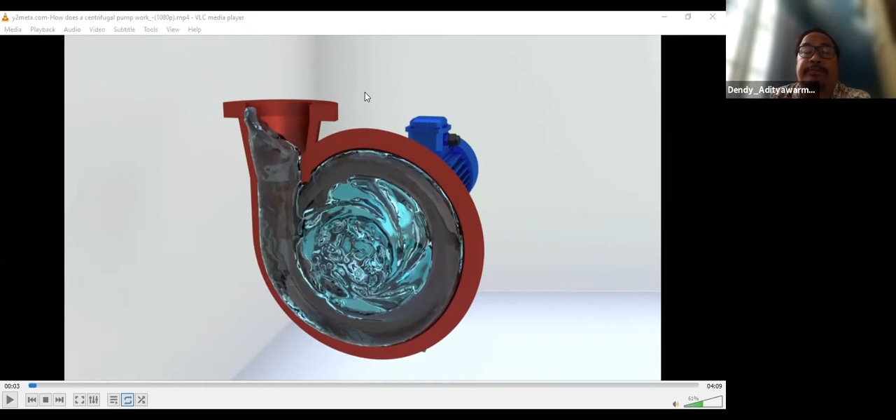Centrifugal pumps are used to pump water, oil, and other liquids. Let's try to understand why these pumps are designed to carry out the task of transporting liquids successfully. The main elements of a centrifugal pump are the casing and the impeller, which drives the liquid.

Sorry, ini oke ya? Enggak, videonya nggak kelihatan ya? Belum ya? Oke ya? Sekarang kelihatan ya? Halo? Kelihatan, Pak. Oke ya, saya ulang.

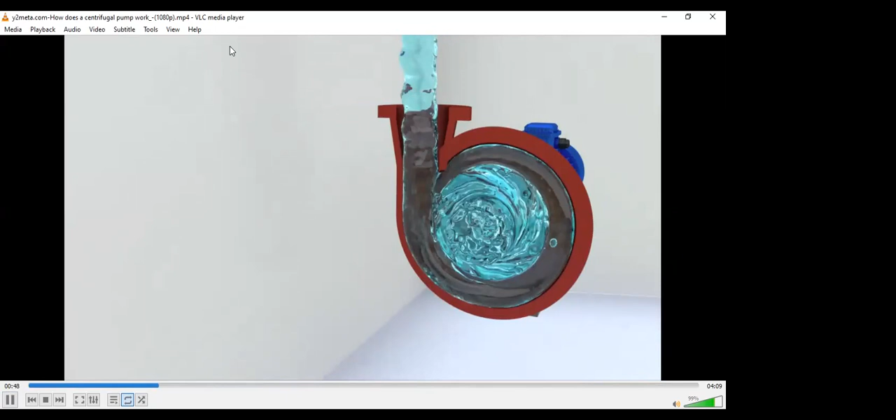Maaf, Pak. Kayaknya nggak ada suaranya, Pak. Nggak ada suaranya nih. Halo? Di saya nggak ada. Mungkin yang lain teman yang gimana, konfirmasi. Yang lain ada suaranya nggak videonya? Nggak ada, Pak. Nggak ada, Pak.

Ini gimana nih? Computer sound. Oke. Mana ya? Oke. Kalau sekarang ada suaranya nih? Ada? Halo? Apa terdengar suaranya, videonya? Nggak ada kayaknya. Nggak ada juga. Belum ada, Pak. Gimana caranya ya?

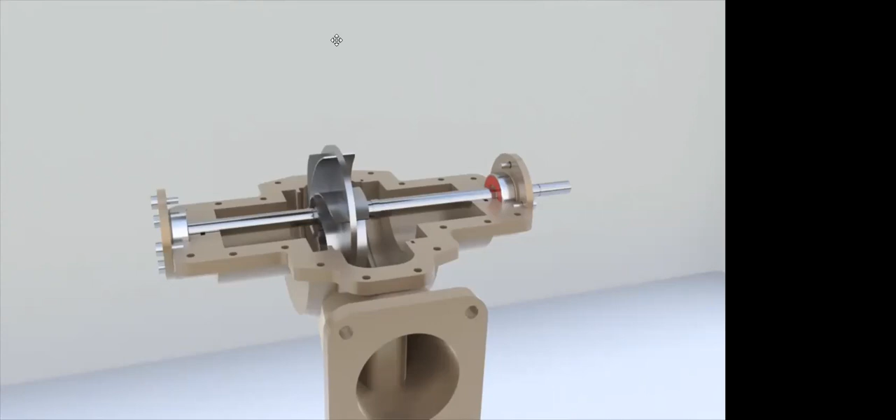Wait. Ini sel. Oke. Ini masih nggak ada suaranya nih. Belum ada, Pak. Nggak ada, Pak. Nggak ada ya. Oke. Oh, ini ada suara nih. Halo? Belum share screen. Belum share screen.

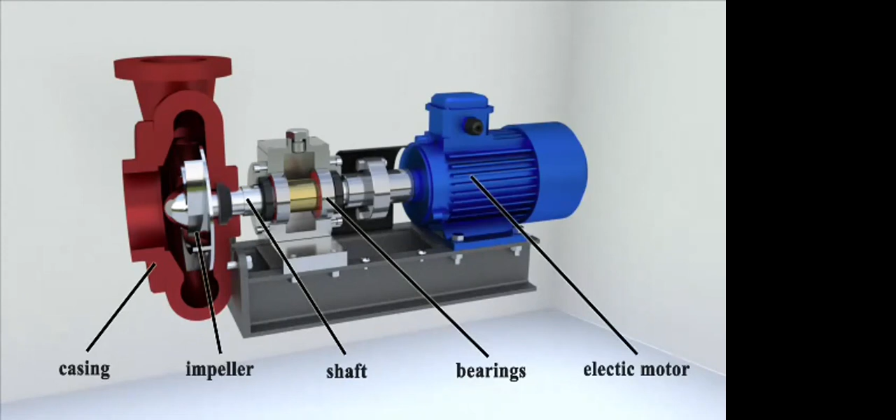The impeller of the pump rotates together with the shaft. The vanes in the impeller act on the liquid and make it rotate. The liquid particles are accelerated. As a result of the impact of the vanes, the energy of the liquid flow is increased. The accelerated liquid particles enter the volute, which converts part of the velocity into pressure. The diameter of the passage section of the volute and the discharge nozzle gradually increases. The fluid velocity decreases, and the pressure, according to Bernoulli's law, increases.

Three main types of impellers are used in centrifugal pumps: closed with back and front discs, vanes and fairings; semi-open with the vanes free on the front side; and open with the vanes free on both sides.

If bearings support only one side of the shaft, the pump is called a cantilever pump. It is a versatile design that is used in small and medium-sized pumps. A heavy impeller cannot be cantilevered. In this case, the shaft is mounted on bearings and the impeller is placed between them. This construction scheme is well suited for double suction impellers where the vanes are placed on both sides.

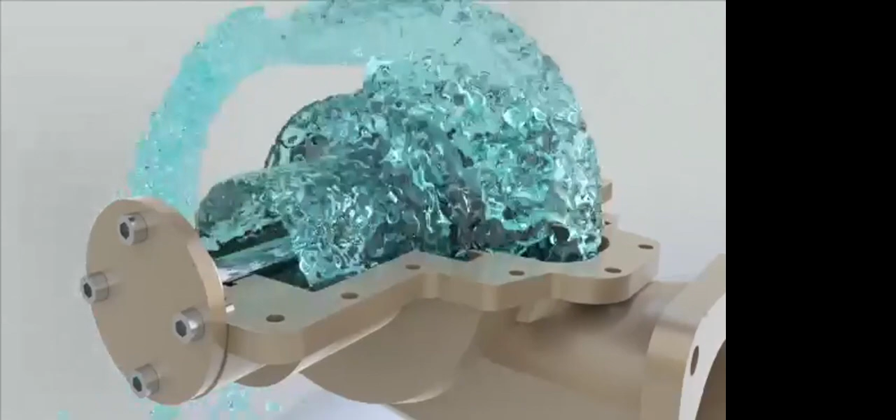A double suction impeller allows liquid to enter the impeller blades from both sides. Thus, we have two pumping units without significantly increasing the weight and dimensions of the pump. This scheme is relevant for pumps. Ini double suction ya. Ya, dibilang tadi bisa memperbesar debit tanpa menambah berat ya.

Pumps with high capacities because the pumping units are installed parallel. Multi-stage centrifugal pumps: by installing pumps in series, the head of the liquid can be increased in the system. Pumps installed in series can be combined by placing several impellers in the same casing. The liquid will go from the first impeller to the second one, from the second impeller to the third one, and so on. Using a multi-stage arrangement can increase the head of the pump many times over, as the impellers are mounted in series, and each of them increases the head.

In multi-stage pumps, different impellers can be used. For example, a screw centrifugal pump has an auger on the first stage and a centrifugal impeller on the second stage. When the pump is running, the liquid flows continuously into the pump casing through the suction nozzle. But what happens if there is no liquid in the pump?

For example, when the pump is first switched on, the pump casing will be empty. For the liquid to fill the pump, the pressure in the pump casing has to be lower than atmospheric pressure. Then the atmospheric pressure will cause the liquid to fill the casing. To reduce the pressure in the pump, some of the air has to be pumped out of the casing.

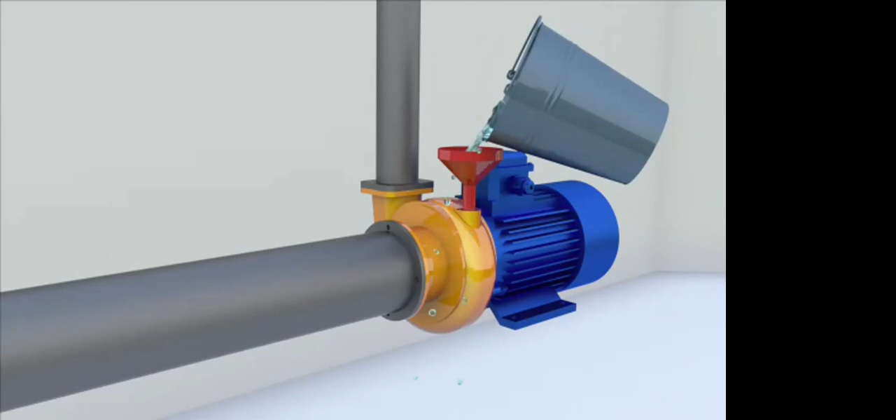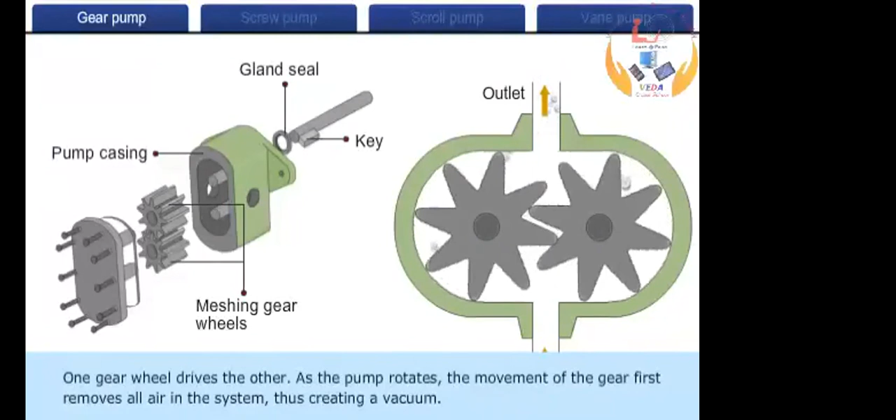As the pump rotates, the movement of the gear first removes all air in the system, thus creating a vacuum. This is because there is very little clearance between gear teeth and casing, which prevents backflow of the air. After all the air is expelled, liquid is drawn and pumped into the discharge pipe. The liquid is transported circumferentially between the casing and the gear teeth, not between the two gears.

The main components of a screw pump are meshing helical screws, an external drive gear, thrust roller races, pump body, and gland seal. Like the gear pump, the screw pump has screws instead of gears meshed together.

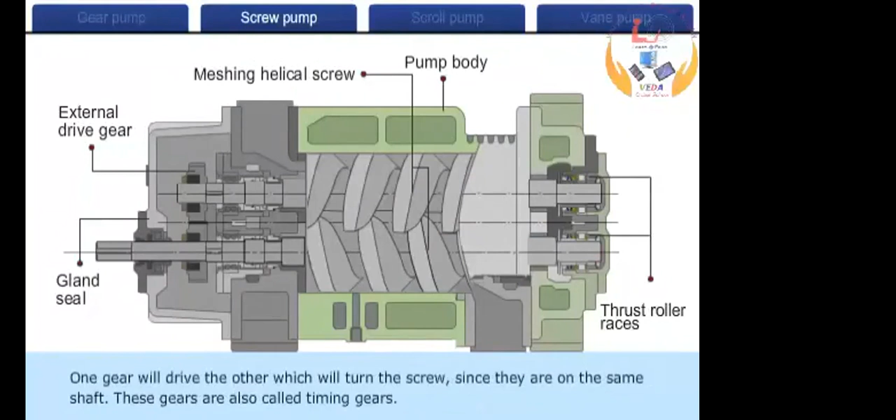Both the screw shafts are provided with gears. One gear will drive the other, which will turn the screw, since they are on the same shaft. These gears are also called timing gears.

As the screws turn, the trapped air in between the screw is pumped out to the discharge side. Air cannot flow due to small clearances between the screw and the casing. This creates a vacuum on the suction side and liquid is drawn into the pump. Liquid that is wrapped around the screw and the casing is transported axially to the discharge side. Screw pumps are often used to transfer lubricant.

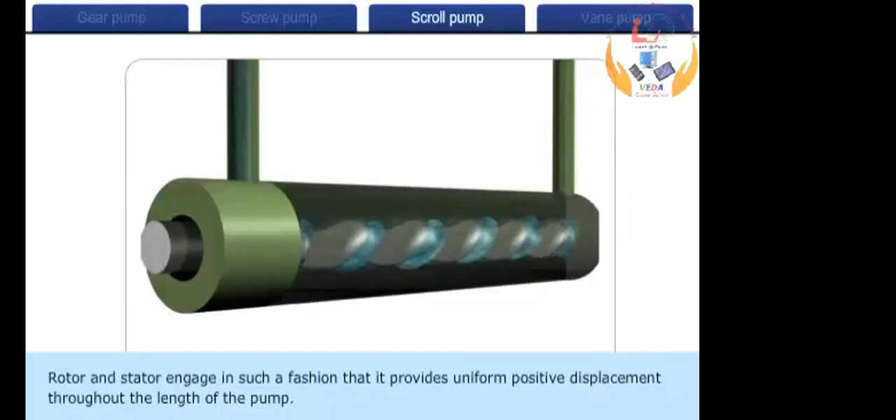The fluid is displaced axially through the pump. The center line of the pump moves slightly radially during rotation. Rotor and stator engage in such a fashion that it provides uniform positive displacement throughout the length of the pump. Also, the rotor and stator form a tight seal that prevents backflow of the fluid.

This type of pump is versatile, as it can be designed to handle a wide variety of liquids. It includes liquids that are more viscous, slurries, pastes, solids in suspension, and even delicate fluids, largely because of the low flow velocities through the pump. Heads of up to about 45 meters are possible for each stage employed. Multi-stage pumps of this type are also used for deep well services.

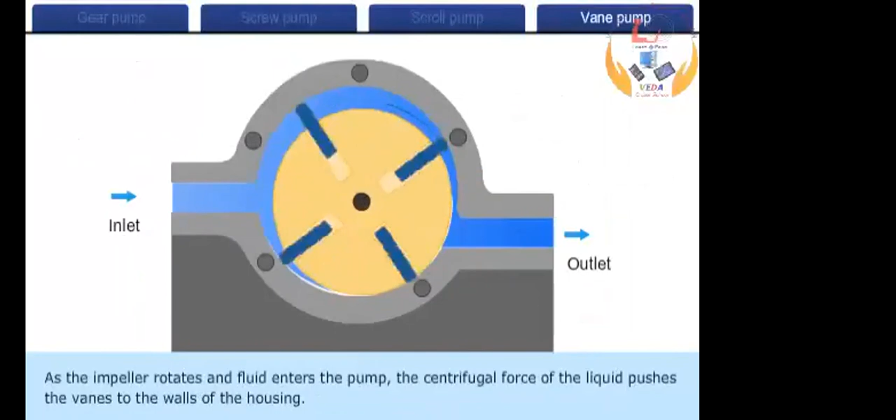Vane pump consists of cylindrical rotors with slots in it. The slots have vanes that can slide in and out. The rotor is positioned eccentrically to the center of rotation of the pump casing. As the impeller rotates and fluid enters the pump, the centrifugal force of the liquid pushes the vanes to the walls of the housing. The tight seal among the vanes, rotor, cam and side plate is the key to the good suction characteristics common to the vane pumping principle.

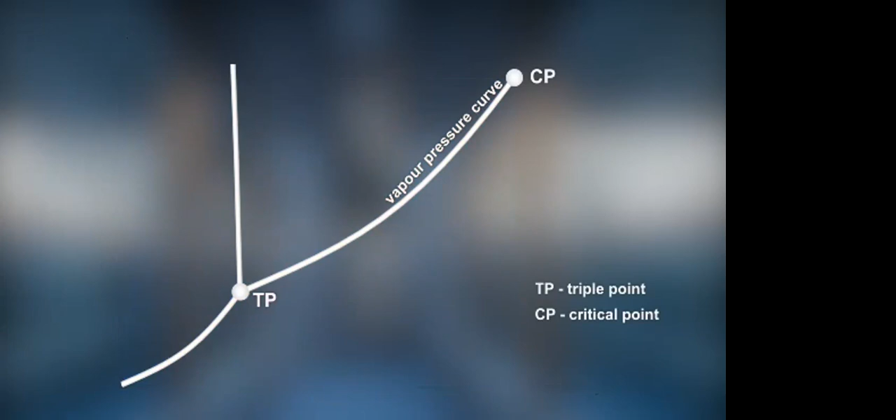Such cavitation bubbles are formed mainly in locations within the liquid where the static pressure becomes smaller than the liquid's vapor pressure. The phase diagram of water shows if water is in its gaseous, liquid or solid state, depending on temperature and pressure. The horizontal axis of the diagram represents temperature, while its vertical axis shows pressure. The vapor pressure curve is part of the phase diagram. It indicates at which pressures and temperatures water evaporates from liquid to vapor, or condenses from vapor to liquid.

At a constant pressure of 1 bar absolute, water in its solid state, which is ice, melts to liquid water at a temperature of 0 degrees Celsius. Keeping the pressure constant at 1 bar absolute, liquid water evaporates when the temperature is increased above 100 degrees Celsius.

Evaporation of water is not only possible when the temperature is increased at a constant pressure. The other possibility is to keep the temperature constant and reduce the pressure below the vapor pressure. Water can evaporate and condensate at temperatures below 100 degrees Celsius if the static pressure is low enough.

This is exactly what happens when cavitation occurs. Bubbles of water vapor form when the pressure in a certain location decreases below the vapor pressure. The vapor condensates back to liquid once the bubble has reached a location with a pressure above the vapor pressure.

But how is it possible that the pressure becomes very low in certain areas of a fluid? Let's have a look at an example for illustration. If objects, such as blades of a ship propeller, are moved through water, there is a higher pressure on the side facing the flow and a lower pressure on the opposite side.

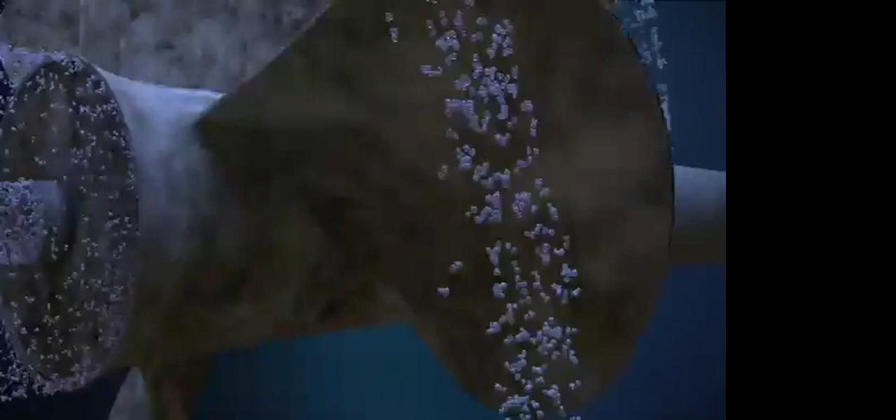On other edges exposed to the flow, low pressure can also lead to cavitation. The bubbles collapse as soon as they reach an environment with a pressure above the vapor pressure.

When pumps circulate water through piping systems, cavitation can occur where the pressure is lowest, at the inlet of pumps and in narrow pipe sections. If the pressure at the inlet of a pump is low and approaches the vapor pressure, cavitation can occur at the pump impeller, as we have seen it at the ship propeller. The pump can deliver less water because the cavitation bubbles occupy part of the cross-section where the water should flow.

Damage from collapsing vapor bubbles will be shown later.

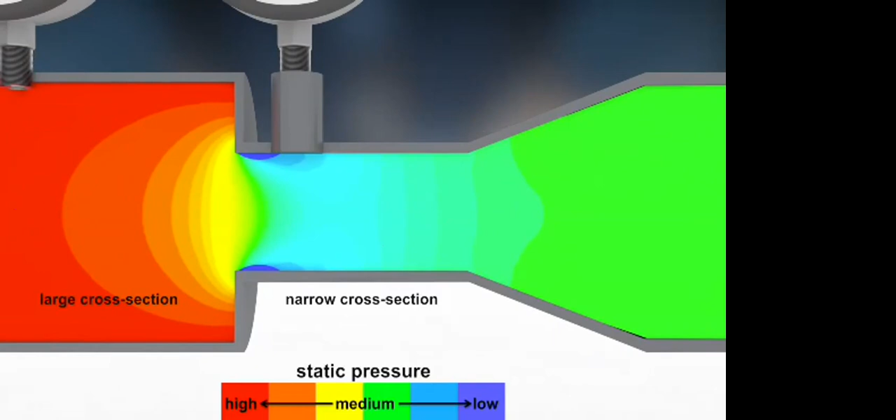The same amount of water per time flows through the pipe with a large cross-section as through the narrow cross-section. Therefore, the velocity is higher in the narrow part and the static pressure is lower. The pressure is especially low at the exposed edge at the inflow side of a narrow part.

We show a detail of a phase diagram of water, which allows us to analyze the situation in a narrow pipe section. The temperature of the flowing water can be 20 degrees Celsius, which is a vertical line in the diagram. It crosses the vapor pressure line at an absolute pressure of 2,300 Pascal. As long as the pressure is higher, water remains liquid. If the absolute pressure decreases below 2,300 Pascal, water evaporates.

The colors in the left visualization correspond to the colors indicated on the vertical axis of the phase diagram on the right. Upstream of a restriction, the static pressure is well above the vapor pressure. The static pressure in the flow decreases as the flow reaches the narrow pipe section. In our example, the pressure at the exposed edge is below the vapor pressure. Consequently, water evaporates and cavitation bubbles are formed.

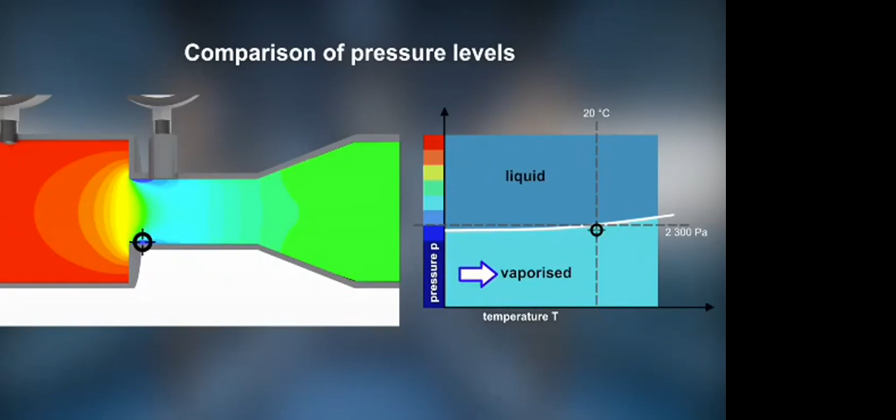The low pressure at the exposed edge causes cavitation bubbles to form.

At a pressure of 2,300 Pascal, a certain mass of water vapor requires over 50,000 times more volume than in its liquid state. The bubbles collapse as soon as they reach a region with a pressure above the vapor pressure.

Because water from the vapor bubble occupies 50,000 times less volume after having condensed to its liquid state, the collapse of each bubble is a spectacular event and emits pressure shocks. Pressure shocks from many collapses result in an audible noise very characteristic to cavitation.

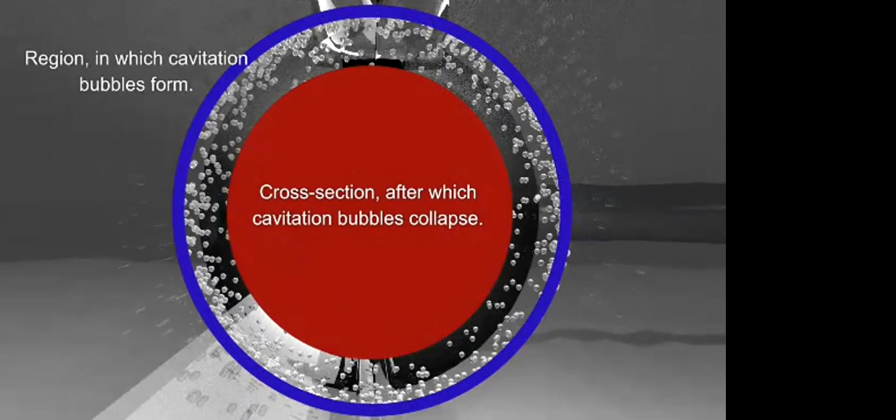The sound used now in the video has been recorded in an experimental setup similar to the one in the animation.

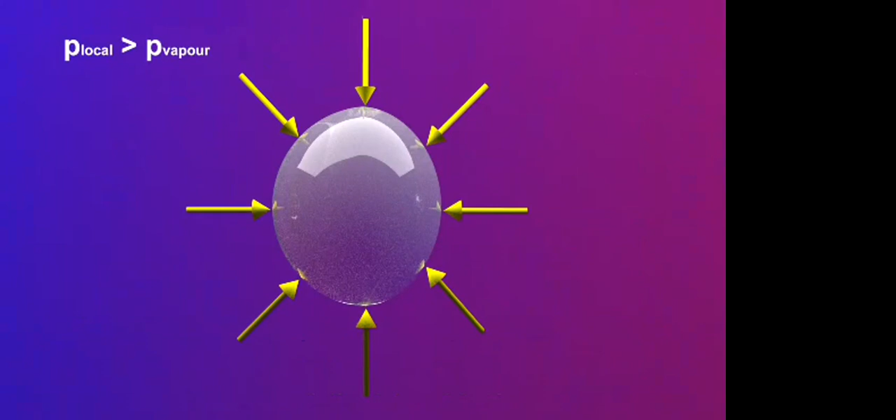If a local pressure exceeds the vapor pressure, vapor condenses, starting from the bubble's wall. Its surface starts to break down at its weakest spot. A microjet forms and pierces into the bubble's opposite surface. The bubble is now collapsing.

The bubble becomes a torus and disintegrates further. The microjet continues to flow in the liquid and can hit a wall. Through its concentrated impact, even high-strength material can be damaged.

The implosion releases energy in a very short time concentrated in a very small spot. If the microjet hits a surface, it damages the material by a localized short-term overstraining.

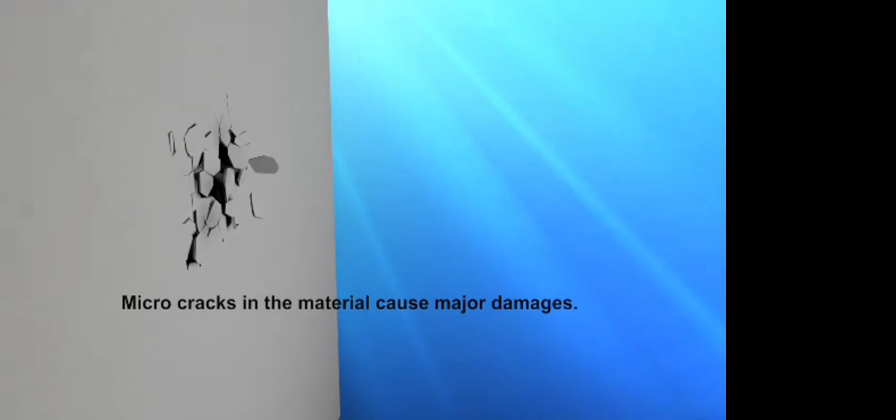We show a few examples of damage in pump impellers kindly provided by the Swiss pump manufacturer Häny. A brand new impeller to the left in comparison with an impeller having been continuously exposed to cavitation during 6 months, another impeller with damage from 12 months operation in cavitation, and one from 24 months.

The new impeller shows the geometry as it should be under normal operation without cavitation. After 6 months of operation under cavitation, material has been eroded in the center of the wheel. The respective areas are highlighted with grey color. The impeller blades are undamaged.

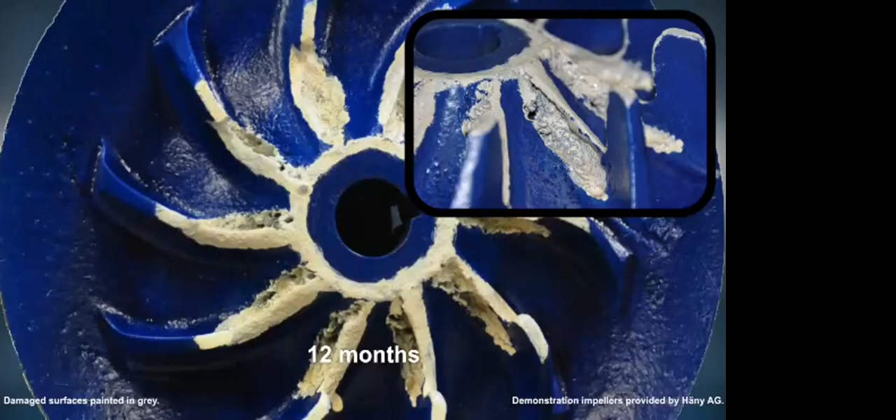After a year of operation under cavitation, the damaged geometry has a different shape, and therefore the flow has a different pattern. The collapsing cavitation bubbles cause material break-off at the top edge of the blades. After 2 years, the blades have been eroded completely, which makes it impossible for the pump to function.

In this video, we have shown the basic mechanism leading to the formation of cavitation bubbles, which reduce the flow of water. We have also seen the spectacular collapse of cavitation bubbles, leading to noise and damage even to high-strength material. Systems have to be designed such that cavitation is avoided.

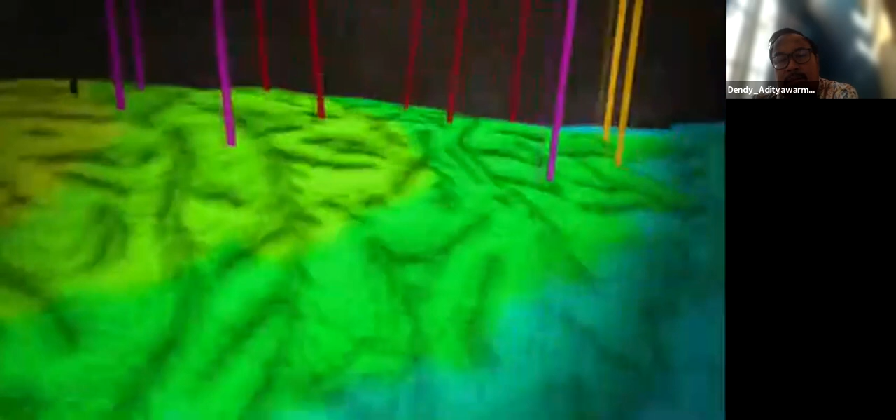120 kilometers off the coast of Norway is one of the North Sea's largest underwater gas fields. It's called Ormen Lange. At 40 kilometers long and 10 kilometers wide, and containing over 300 billion cubic meters of gas, it's simply massive. But it's locked in an icy tomb 3,000 meters below the sea surface, so deep and so remote that it's considered beyond the reach of man and machine. That is, until the engineers at Norsk Hydro, the Norwegian energy company, decide it's just too tempting to ignore, because there is enough gas to supply 20% of Great Britain's gas needs for 40 years.

The engineers know that in Britain there's an expanding market for natural gas. The coal they have traditionally used to power their economy is no longer sustainable. The Brits are increasingly using foreign gas to power the turbines that create electricity for their homes and factories, and they need more of it. So the engineers have come up with a plan.

It will take 10 years and cost $10 billion. First, they'll drill the Ormen Lange gas deposit, transport the gas 120 kilometers to one of Norway's largest processing plants at Nyhamna, then send the processed gas to the UK down the Langeled pipeline, a staggering 1,200 kilometers. But to build the world's longest subsea pipeline this far and this deep requires overcoming some...

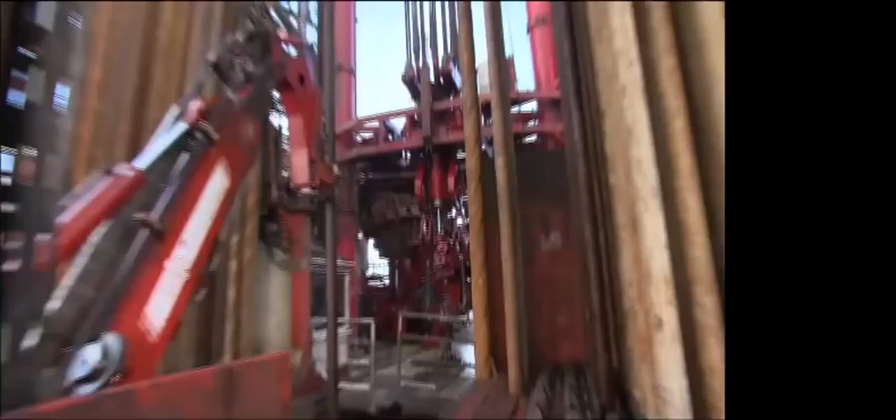They're drilling nearly 2,000 meters through the seabed to tap the gas field, and they'll do this with a rig built right on the sea floor.

The real fun begins with this, the Storegga slide. The pipeline that brings the gas out of the field and delivers it to the plant has to scale this 300-meter underwater cliff face. And the seafloor terrain is too rough to lay pipe on, so that means trenching this monster.

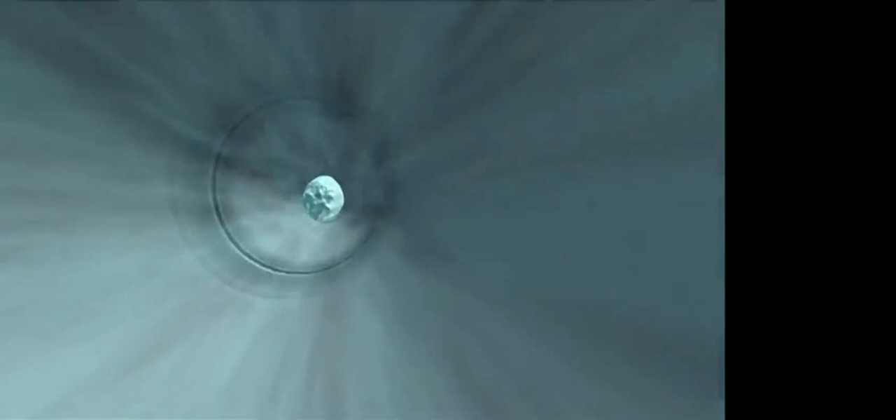The gas itself is a dangerous mixture of debris and frozen water that could blow a processing plant apart, so they're adapting the system to handle the Ormen Lange gas. The plant is big enough to turn through 70 million cubic meters of the stuff each day.

To handle this mega job, they've amassed some of the largest industrial ships in the world, each designed to tackle a specific phase of the deep sea construction.

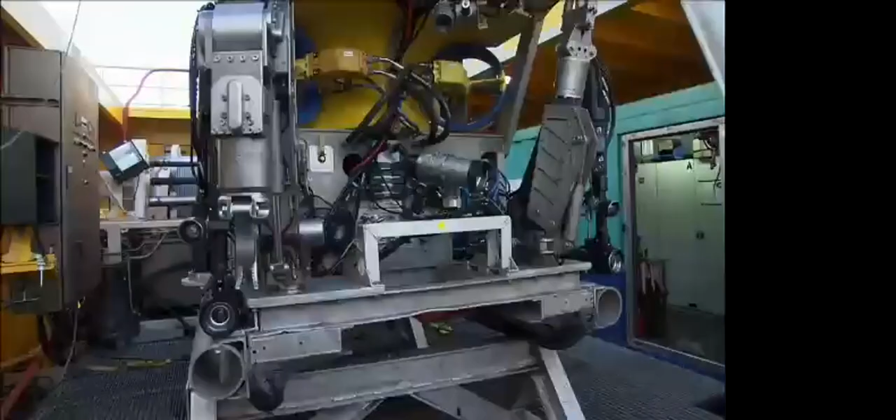Out here in the harsh North Sea, humans are confined to the topside world. Beneath the waves, the brawny work is done by these underwater remote operated vehicles, or ROVs.

They're a fantastic new breed of machines and are so technologically advanced, they're the stuff of science fiction.

It's a monumental challenge, but with a pile of gas industry money behind them, the engineers can dare to dream. But are these guys going too far? Can they make this dream come true, or is this going to be an engineer's nightmare?

First, they search the world for a gas well platform which would work in these torturous seas. Existing designs fall short. The weather here is too stormy. The water too deep.

Then they suggest a revolutionary solution. If they can't bring the gas up to a rig, why not take the rig to the gas?

Inside this warehouse in Tonsberg, on the coast of Norway, the key piece of solving that engineering challenge is being built. It's a daring move. The engineers are combining the function of a surface platform with a seabed drill guide. It's called a template, and it's an underwater gas platform that guides the drills through to the gas field and controls the well flow.

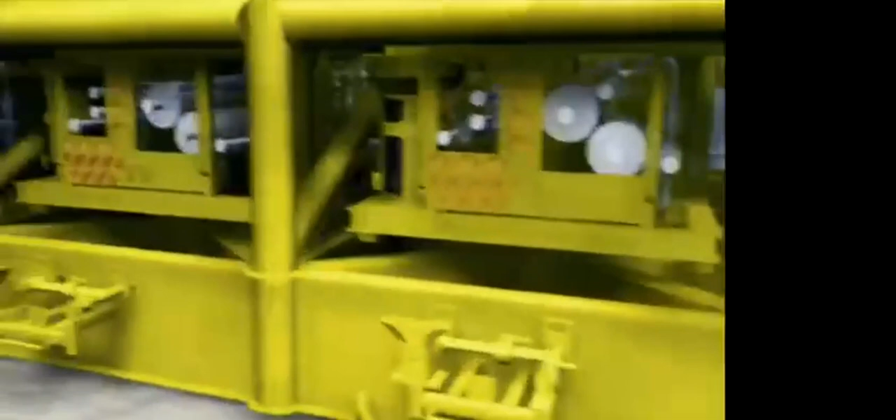Conventional gas platforms are sea surface structures, manned by an army of workers. In this case, the platform is dropped onto the seabed, clear of the wild North Sea weather. A drill ship then docks to it, and from above guides the drills through to the gas field.

When the drilling is finished and the gas is flowing, the drill ship departs, leaving the template to control the wells. Four of these monsters will be mounted on the seabed. Through them, a total of 24 wells can siphon over 70 million cubic meters a day from the gas field.

The template will then direct and control the gas flow to a shore-based plant, the entire unit operating by remote control from a manned center 120 kilometers away.

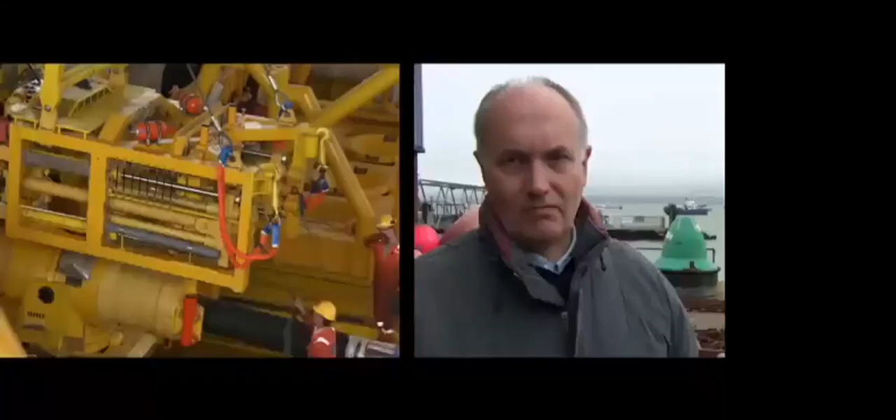Richard Benyon is a subsea engineer. The main difficulty you've got is it's dark, it's a devil of a job to put it in the first place. You've got to get this equipment onto the floor. It's a highly valued, highly priced piece of equipment, and then you've got to put it together with robots, and you've got to make sure it doesn't leak. And apart from that, it's easy.

The stakes are huge. Engineers are building it to withstand pressures that would crush a normal submarine, and it has to operate flawlessly for over 40 years in a harsh saltwater environment. Once it leaves this warehouse and is lowered to the sea floor, there's no going back. It's going to be committed to the seabed forever.

This 1,000-ton monster can't float on its own, so the structure is loaded onto a seagoing barge for transport to the drop site. With all the planning and building behind them, it's the weather that will determine if this mission is a success or failure.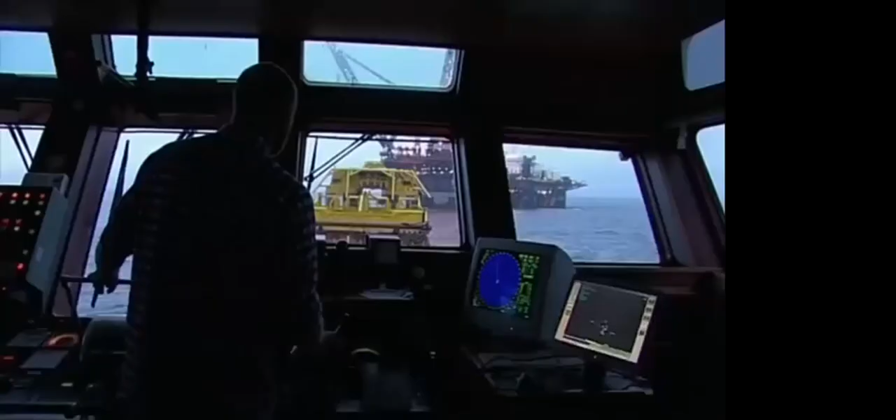It's a 4-day journey to the drop site, and they've planned it to coincide with summer, the season of the calmest seas, which doesn't mean much here in the North Atlantic. They rendezvous with the world's largest crane ship, the Thialf, a super crane that does heavy lifts at sea. The 2 cranes mounted on board can lift over 14,000 metric tons, about 80 747 jumbo jets.

The barge and Thialf wait for a weather window before lift operations begin. The contract to install the subsea components is worth $21 million. With so much at stake, they practice back on shore. The crane and ROV operators rehearse the drop in a 3D virtual underwater world, like the one they'll be working in.

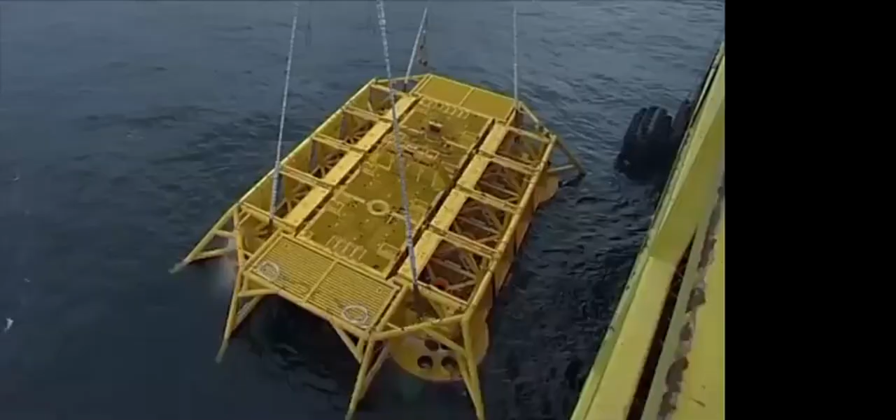With weather, depth, and weight going against them, they practice. Now it's time for the real thing. Lines are connected, and the record-breaking sea drop begins. This is their only chance. If they miss and it settles on the seabed in the wrong place, they'll have to build another one and set the project back by a year.

Computer-controlled thrusters hold the crane ship over the drop site. As it goes below the surface, the underwater ROVs are put into action to take over as the eyes on the operation. They feed video back to the control room, and the engineers scan the rig for problems as the pressure increases.

From 1,000 meters below, the ROV feeds video back to the crane operator, who adjusts the orientation. They have to keep the ball bearing as close as possible to the center of the bullseye. He keeps the drop going, even when it's meters away from the sea floor. He's committed. There's no stopping it now.

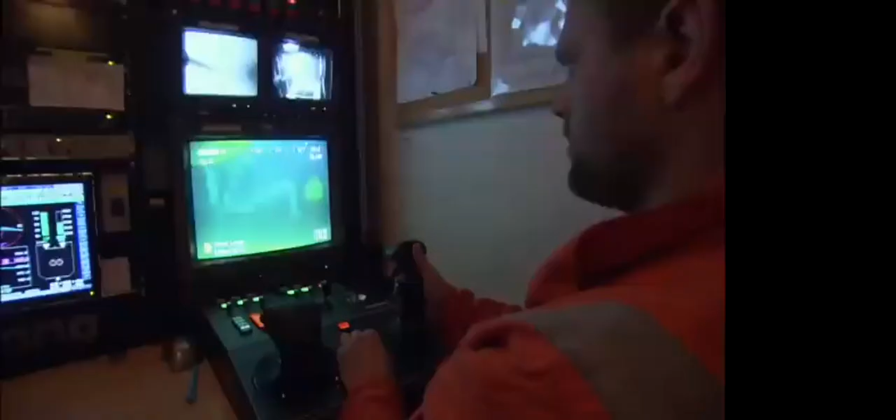It's down, and it's so heavy the legs on the base sink 8 meters into the seabed. But they won't know if they landed on the right spot until they check the coordinates. The reading shows it's within 40 centimeters of their target, close enough to be considered a perfect drop, accomplished from 1,000 meters above on a rolling sea.

Now that the template has been successfully placed, the next step is to tap the gas field. It takes 2 years to drill the first 8 wells, and they must have them ready to go before the pipeline can be connected. A specialized drilling ship, the West Navigator, is moved into position over the top of the gas field. The Ormen Lange gas wells will be the largest deep-water wells drilled in the world.

They drill the field with a powered drill head operated from the ship. Once assembled, the pipe is lowered through the bottom of the ship and down the 1,000 meters to the template. From here, the drill head moves another 2,000 meters through the seabed to the gas deposit, and then it snakes its way through the gas pockets.

Every step of the way is monitored and recorded in a virtual database, which keeps expanding and is used by the engineers and surveyors to plot the next drilling spot. Back on land, the team can enter the cave, an amazing 3D undersea world. By virtually passing over the seabeds and the gas find, they can locate the most promising parts of the deposit.

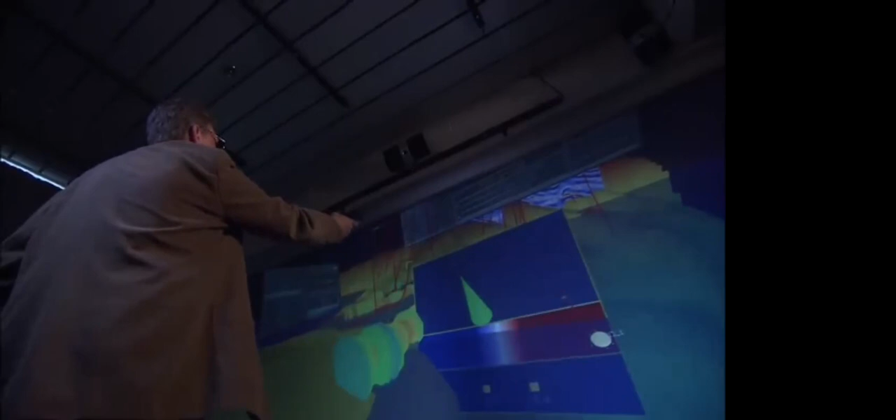Jens Grimsgaard can plot the drill's movement from the cave. With a joystick, I could also fly in this world by just using this tip here, and using the movements of my hand to steer myself through this reservoir.

During the drilling, data collected by the drill is sent back in real time to this database, which is constantly being updated. The computer generates the images.

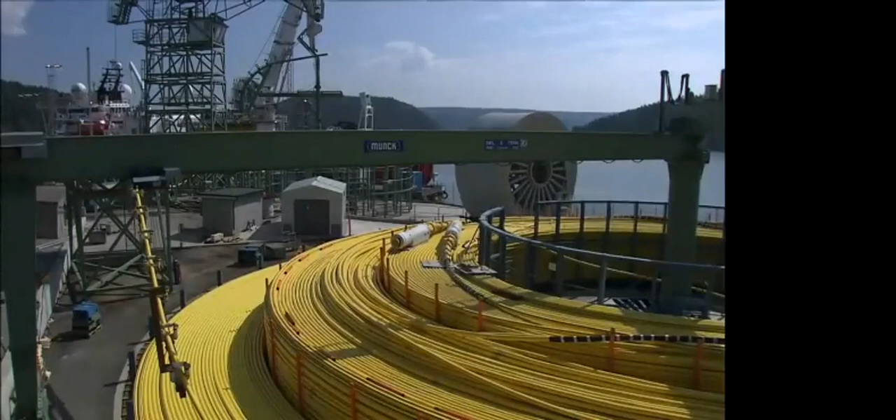The template gets its power from the land through a 120-kilometer control cable called an umbilical. This cable...

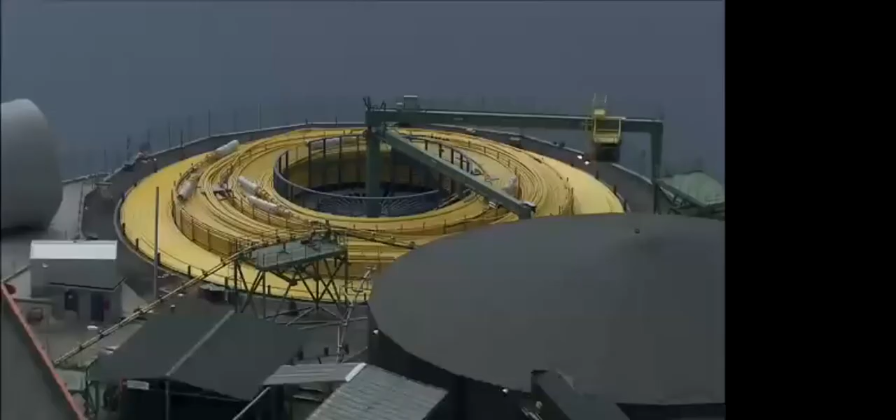The cable is built in a factory right on the dock. As the cable is made, it is fed onto a giant spool on the deck of the Scandi Neptune. Once the 120 kilometers of continuous cable is spooled up, it will head out to the Ormen Lange gas field to connect the control room to the four underwater templates.

But now, they have to prepare the seabed. The bottom of the ocean under the North Sea is a treacherous place. And, as you're about to discover, the engineers building the world's longest underwater pipeline are facing a mountain of trouble.

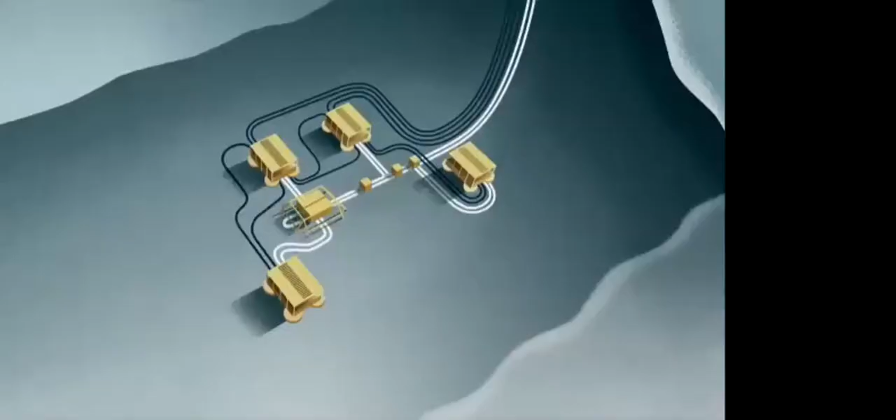8,000 years ago, two pieces of Norway, each about the size of the island of Tobago, slid into the sea, causing a mega tsunami. The landslide, known in Norwegian as the Storegga, created a huge shelf in the ocean's topography. The Ormen Lange gas field is on the edge of the Storegga, locked inside the huge depression left behind by the slide. This underwater disaster created a mountainous seabed with peaks that rise between 25 to 55 meters. But the biggest concern for Hydro is how to get the pipeline up the Storegga slide face, a whopping 300 meters. That's nearly as tall as the Empire State Building.

Underwater surveys reveal a rugged and fractured seabed. But the unstable sediments have long ago disappeared. The rock is more than stable enough, and it would take a new ice age to dismantle it again. But the study has made them more aware of the seabed and the pathway they will need to clear for the pipeline that will connect the underwater.

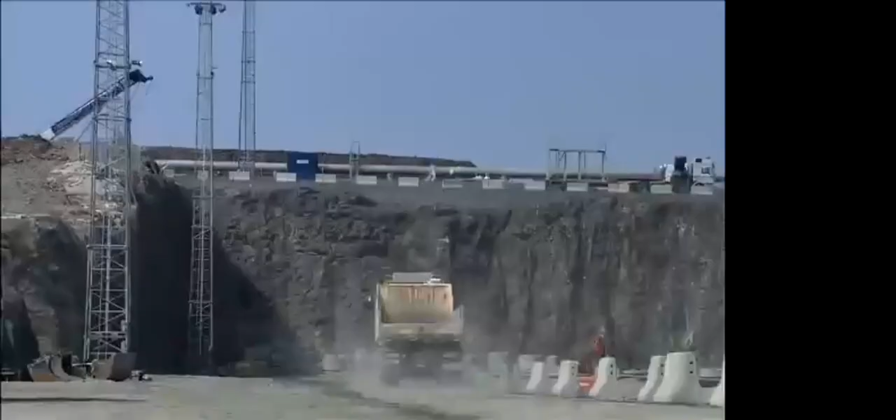Here, the raw gas from the Ormen Lange gas field will be converted into usable fuel. But to do that, over 2 million cubic meters of rock is being carved from the island, and over 30,000 tons of steel brought in.

Almost overnight, what was once a small village has become the busiest construction site in Norway. Over 2,200 workers are on the job site each day to keep this mega gas plant rising from the rocky coastline.

There's a canteen to feed 1,000 people at a sitting. Each night, the workers retire to the hotel, which will provide 1 million guest nights over the course of the project. But it will be removed.

Three-dimensional models of the plant have been built, and the engineers walk through it in virtual reality before and during construction. Every bolt, I-beam of steel, is pre-visualized. Because of the volatile gas, the specifications have to be executed perfectly.

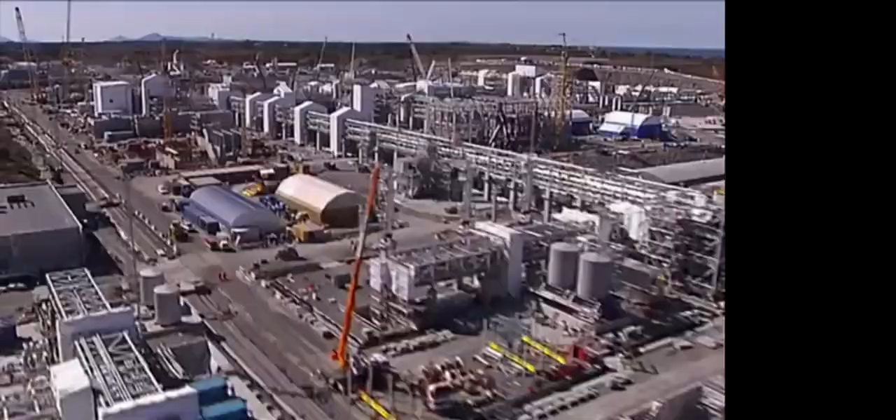But the plant has been built for efficiency. The raw gas travels through the pipes and is converted into usable fuel in a mere 10 minutes. That's a blink of an eye in this business. Then it will be ready for delivery to the UK.

The gas processing units are delivered to the island by ship. Cranes offload the components onto this massive flatbed transport. This remote-controlled monster has 48 independent axles and 96 wheels. It expertly shuttles the thousands of components needed to build the plant.

Here on land, the workers have a close working relationship with the job site. But offshore, the workers hand in their wrenches for what else? Joysticks. Offshore, the underwater work is done with remote-operated vehicles, or ROVs, from pipe laying to heavy lifting. And that requires a lot of different ROVs and people who can operate them.

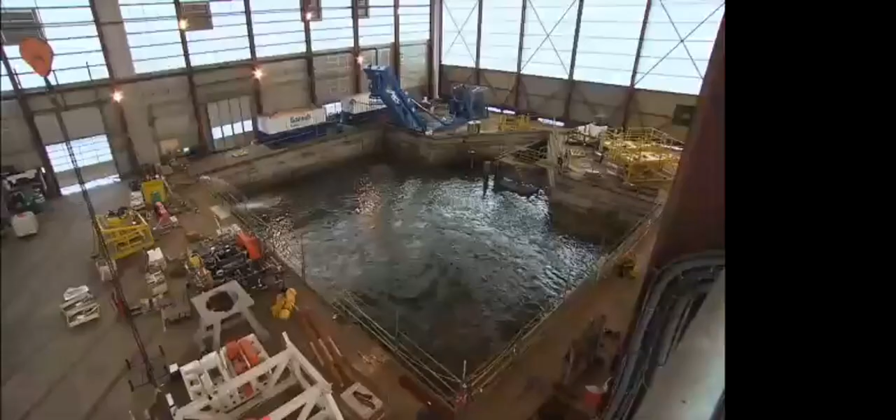In this warehouse is a simulation tank built just for offshore personnel to train on ROVs. It's driving school for robot jockeys. Here, they simulate projects that will take place.

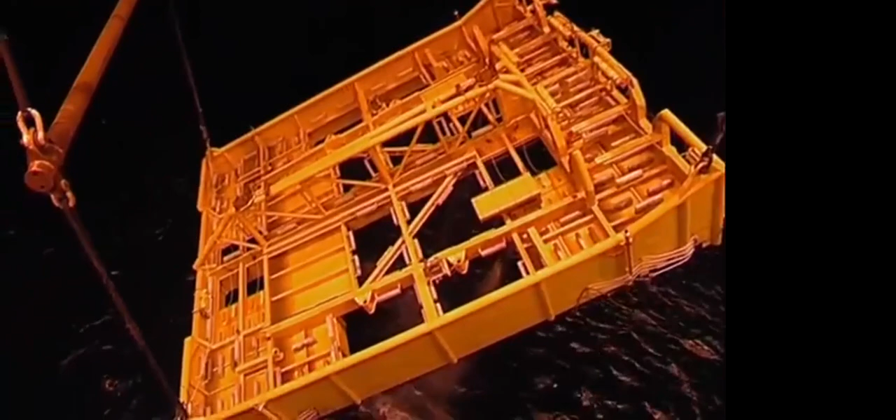This is the Pipeline End Termination Unit, or PLET, a big machine for one simple task. It connects the underwater template, or gas well, to the Ormen Lange pipeline. But it's never that simple. At 35 meters long and 30 meters wide, this 350-ton device is being lowered the 1,000 meters to the sea floor.

Now that the PLET is on the sea floor, they assemble its components. Called modules, these components make the crucial connection between the template and the pipeline that feeds gas to Nyhamna. All the connections at this depth are made with ROVs.

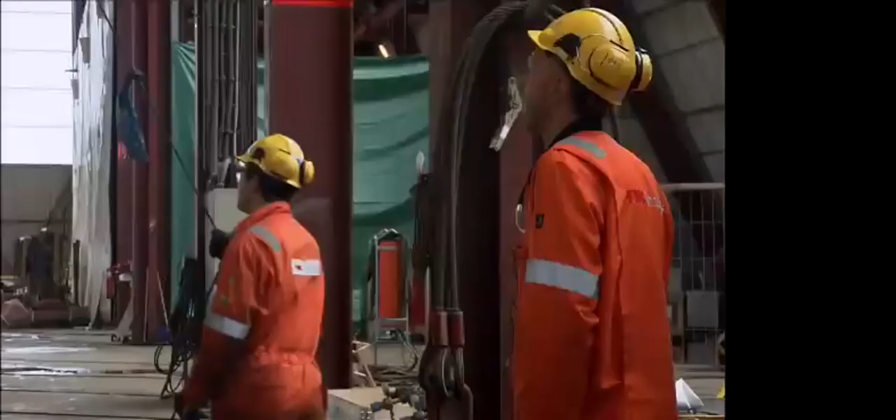But they can't do any of this work without first testing the systems. Thomas Berndt is the subsea manager. We are testing and testing and testing here, and when we leave this hall, we are 100% sure that this connection will be tight when we come offshore. There won't be any leakage. A leakage offshore at 850 meters with large volumes of gas is a disaster, which we have to avoid.

They practice lowering the modules and testing the connections, which will be handling 70 million cubic meters of gas each day. They're training with an exact replica of the one that's on the sea floor. It's a large investment, but money well spent.

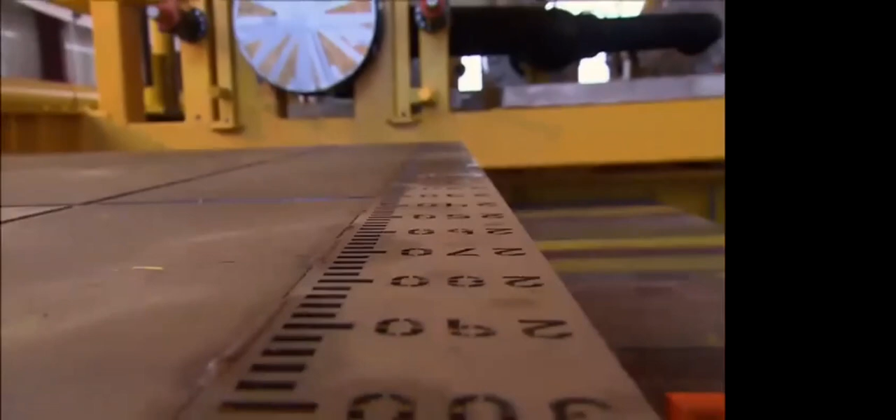Surrounding the connection module is a steel cage that protects it from stray objects that could drop off the drill ships and fishing trawlers. When the gas exits the field, the steel pipe expands. A little bit of expansion is okay, but the reason they're going to this much trouble is they expect the Ormen Lange pipeline to expand along its entire length by as much as 1 meter, and that's enough to rip it apart. So they've solved this by using a connector that slides back and forth on rails. It absorbs the pipe's movement and keeps the gas flowing.

Meanwhile, the engineers are tackling the Storegga slide and trying to get the umbilical cord, or control cable, run from the template to the control center, 120 kilometers away. But to do this, they have to find a way through the rough and tumble terrain left in the wake of the slide. The solution is to build an underwater excavator, agile and strong enough to handle the job. It's a daunting prospect.

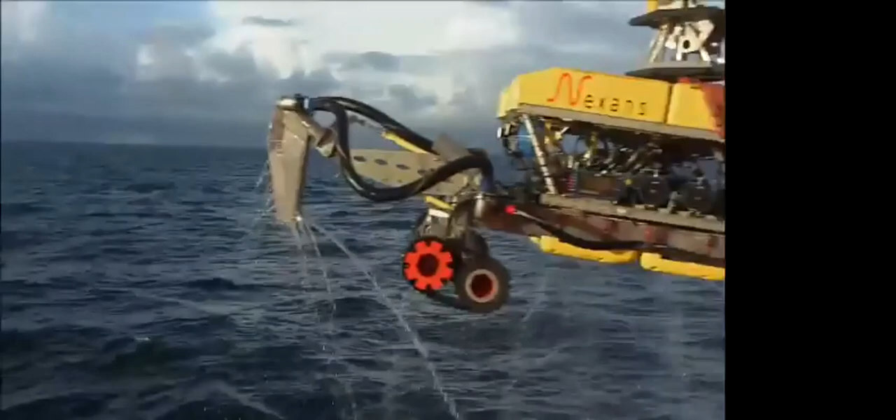That is, until they built the Spider. The machine that inspired this one was originally built for the Swiss forest industry. And like its Swiss cousin, the Spider moves along using powered tracks and articulated legs. Its mission is to excavate 6 trenches at water depths up to 1,000 meters. The biggest of them is a 4-meter wide by 4-meter deep monster trench, big enough to drive a truck through.

One Spider is outfitted with a powerful shovel. It's strong enough to cast aside a 3-ton boulder. Instead of a shovel, the other Spider has a suction nozzle, powerful water jets.

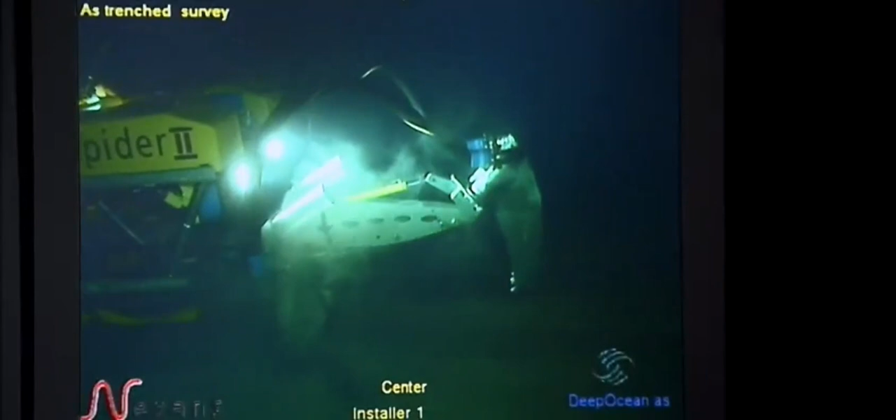The jets break up the sea bottom, and the nozzle sucks it up and fires the mud to the side.

All the while, the Spiders will contend with slopes up to 35 degrees. There are sensors on all movable parts, connected through an umbilical from a support vessel, which floats above and monitors its progress. The umbilical carries power and control cables and lets operators manipulate the 6-meter-long spider to within 10 centimeters of accuracy, from 1,000 meters above. It's an unprecedented mobilization of such complicated and agile robots.

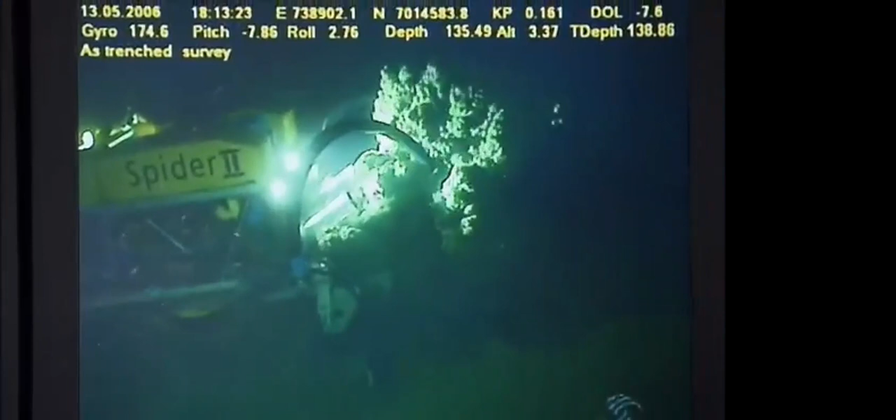In all, these two champion diggers managed to excavate 3,500 cubic meters of soil, creating a safe path for the gas pipeline.

The Langeled, which runs 1,200 kilometers from Norway to the UK, is the...

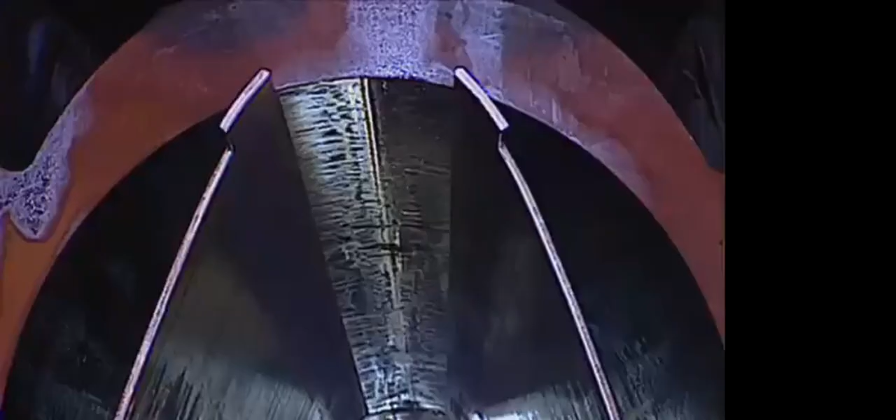This job requires 1/3 of the world's combined pipeline production capacity. That's over 1 million tons of steel. The value of the pipeline contracts is an unimaginable $700 million.

Langeled uses pipes over 1 meter in diameter, and each single piece of pipe has to be able to stand the enormous pressure on the sea floor for the next 40 years.

The pipes are each 12 meters long and weigh 10 tons. Another 10 tons of concrete and metal is added to give them enough weight to stay on the ocean floor. A total of 100,000 steel pipes are needed to span Norway to the UK.

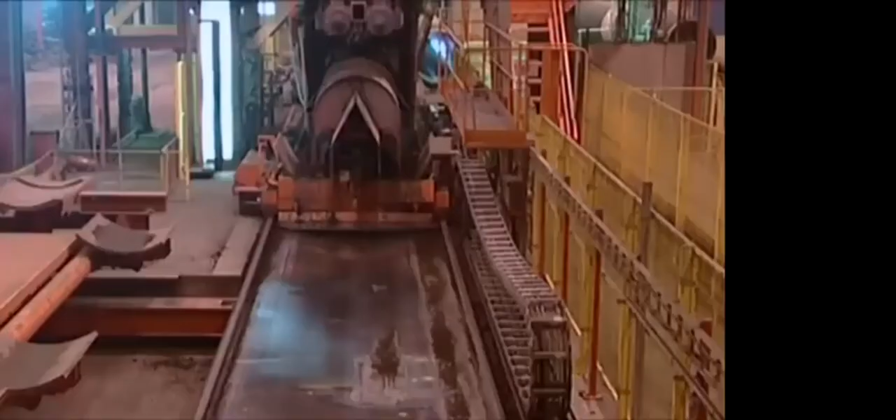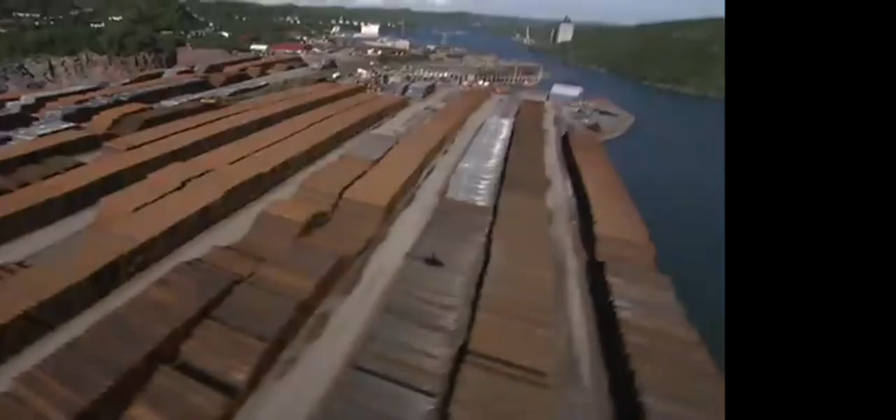As the team is trenching on the steep Storegga slide, the rest of the route from the top of the slide to the shore is being prepared. This is the Island Frontier, a state-of-the-art trenching ship that combines two types of trenching methods into one powerful machine.

They survey the flat areas where they think they can bury the pipe by scraping a trench through the sandy bottom. What they discover is not a pretty picture. The sandy bottom is actually clay, and the clay is hardened like concrete.

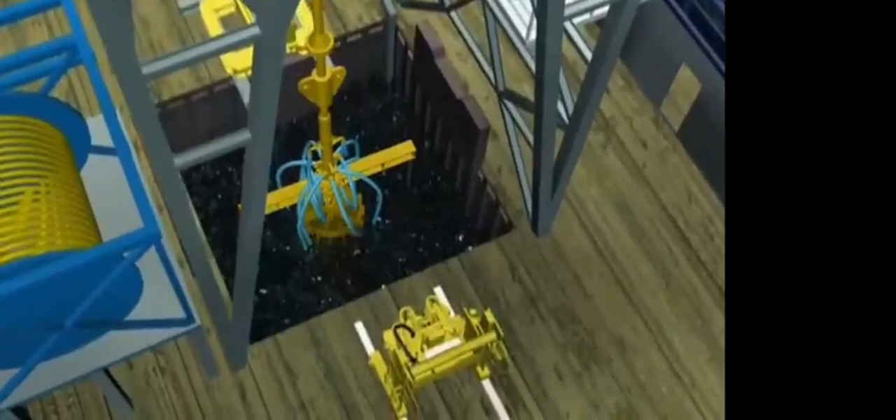A new digger is required to cut a channel up to 7 meters wide and 5 meters deep. The margin for error is only 50 centimeters on the width and a crucial 10 centimeters on the depth. The clay cutter hybrid, the only one in the world, is lowered to the seabed. The cutting tool uses its 24 water jets set at different angles to blast a trench through the clay.

Suspended above is the 4-ton jet prop. The propeller draws in large volumes of the surrounding seawater, driving it at a high force towards the seabed, clearing debris from the trench.

Transponders mounted on the sea floor relay a 3D picture of the operations to the control ship. Following along the entire operation, like a foreman on a job site, is an ROV that surveys the trench and confirms that it is dug to specifications.

The battle of the clay is finally won. But when they start to lay the pipeline on the seabed, the problems really begin. The seabed under the North Atlantic is a tortuous and irregular landscape. There's over 1,000 kilometers of terrain like this along the pipeline route from Norway to England. It's so rugged that only small sections of these heavyweight pipes will actually make contact with the seabed. It's called free spanning, and they don't want it. It means the unsupported sections of pipe will sag, stress, and then break under their own weight.

This would be an environmental catastrophe. They have to find some way of flattening out the pipeline route. If you're not able to plane the seabed flat by moving the earth out of the way, you may have to fill in some holes with rock or other fill material.

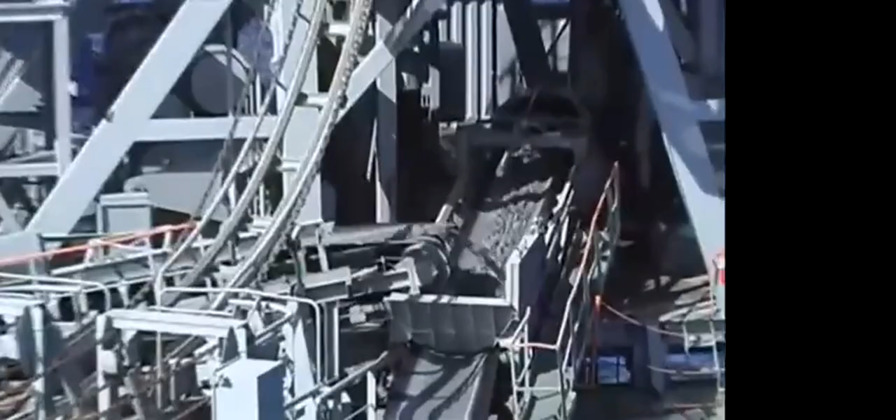They level the pipeline route by laying gravel down on the sea floor. This ship loads gravel into its cargo holds and delivers it to the area that needs leveling. It can carry over 9,700 tons of gravel at a time.

Once at the job site, it uses a flexible fall pipe to place the gravel on the pipe pathway. Computers create a 3D model of the seabed and the path where the gravel needs to be placed. This method allows the crew to place the gravel precisely where they need it.

At these sort of water depths, you've got a problem because you haven't got that degree of control. Whatever's doing the work down there is a huge distance away from the mothership, and they've still got to present a flat, smooth profile for the pipeline to be laid upon. The other thing that has to be worried about is that you have to do that profiling as close as possible to the time the pipeline is going to be laid, because Mother Nature tends to move things around again after you've left. You come back a couple of weeks later and find there's been a storm or whatever, and what you've taken so much care to flatten out has all of a sudden been moved around again. So you would lose the work that you've done before.

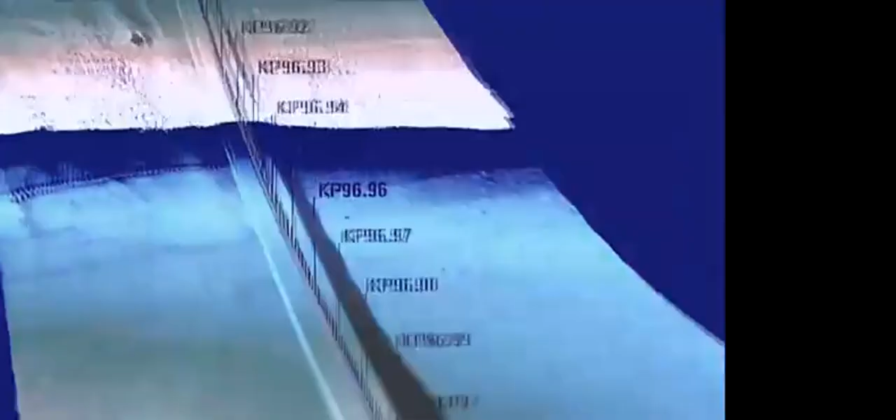The pipe laying itself is a monstrous job. Once the pipe has been manufactured, it is placed onto supply ships for delivery to the pipe-laying barge, the LB200. The barge is huge, longer than 2 football fields. It's an enormous floating steel welding factory, which has to work with military precision. There are only 3 of this type of ship in the world, and Hydro is using 2 of them here.

The pipeline route has been surveyed before we ever came here. We have ROV boats.

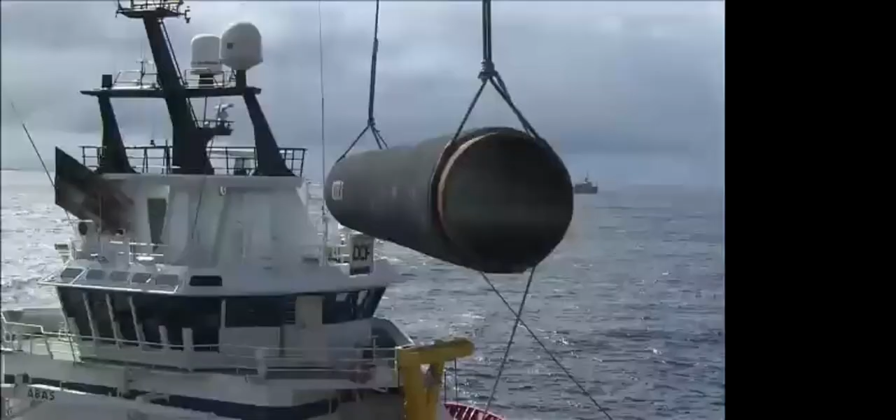The barge moves along at 4 kilometers a day and needs a constant supply of pipe sections, which must be delivered in the order in which they are to be connected and laid down. It's 100,000 pieces of pipe laid end to end in a predetermined pattern. They get moved by crane 3 or 4 times and go through about 15 or 20 welding stations and coating stations.

The pipe sections are delivered to the assembly floor, deep inside the LB200. Here, the welders are divided into teams. Their job is to create sections of pipe called double joints. These double joint sections are 24 meters long.

There's a lot at stake. The pipes have to be put together so there's no chance of leakage, and the assembly line has to keep up a steady pace.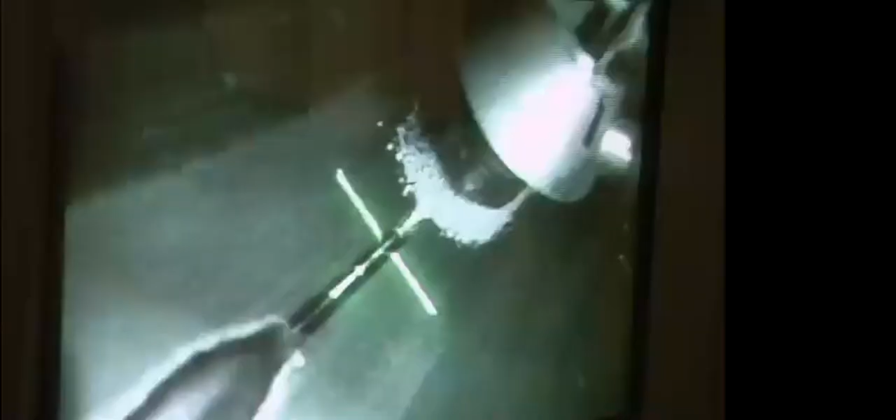The entire operation is monitored by engineers who have video cameras that put eyes on the process, both inside and outside the pipe. It's incredible technology, but the fundamentals are very simple. The fundamental thoughts that go behind it, because it has to be so rugged and it has to work every time, first time, mean that the actual basic engineering is still fairly simple.

The next stage of the assembly line is to join this short section of pipe to the main pipeline. It's being fed out of the back end of the ship and onto the sea floor. It's a complex process that requires a lot of fine-tuning.

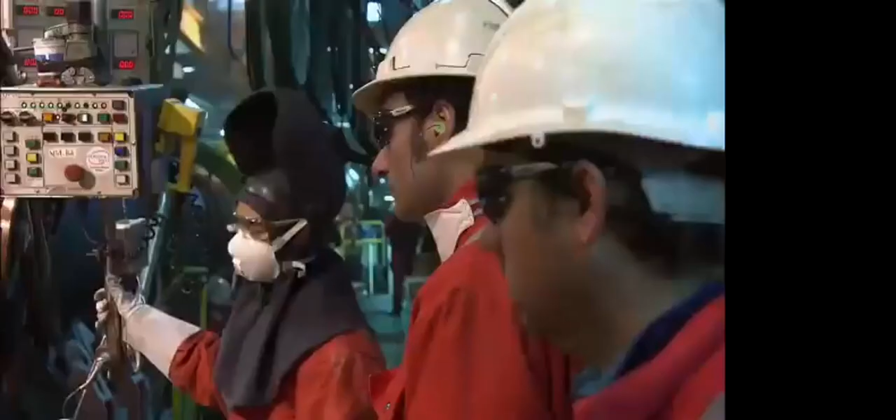This is no ordinary welding operation. The process involves a special welding machine with 8 heads per station.

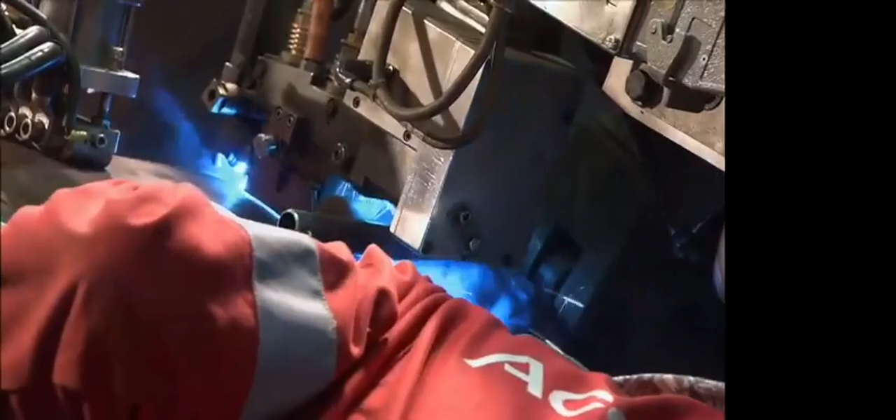The assembly line is manned by industrial workers from over 30 countries. Shifts work around the clock to keep the assembly moving 24 hours a day. Each day, the teams have to assemble 3 to 4 kilometers of pipeline and drop it to the sea floor.

After all the welding stations have linked the pipe, the final step of the operation is to seal the exposed metal. It is covered in a protective heat-shrunk plastic. Without this, the steel pipe would corrode in the seawater.

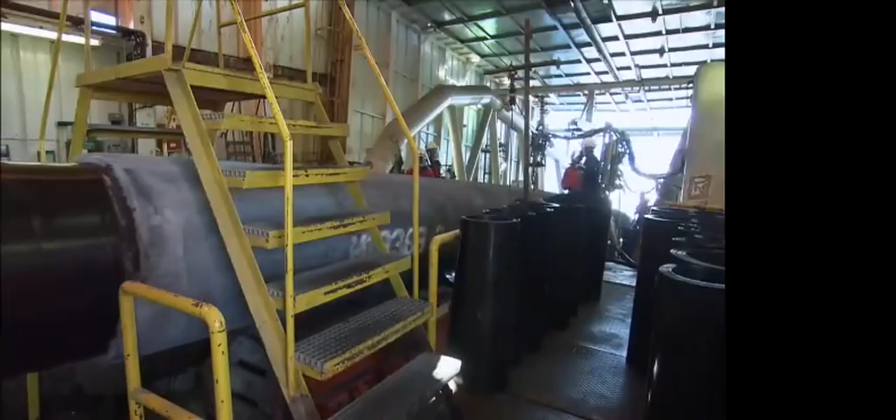Now, for the most critical step of the operation: offloading the pipe to the sea floor. The section where the pipes are joined is covered in foam to protect the welded joint during the drop.

The decks are cleared and the pipe is now ready to be committed to the sea floor. A rubber tensioner grips the pipeline and holds it in place as it slides off the barge.

As the pipe enters the ocean, it begins to sag and pressure is put on the entire pipeline, which is free hanging beneath the ship. Without exactly the right tension, the pipe could snap like a matchstick.

The pipe comes off the back of the barge in what's called a lazy S configuration, trailing down to the seabed some distance behind. That S of unsupported pipe has to be kept from buckling under its own weight. So to keep it under control, you've got to keep it under huge tension to stop it from collapsing under its own weight.

As the pipe is lowered, the barge moves forward 24 meters, not a meter more. With this well-oiled operation, the LB200 is able to lay over 100 kilometers of pipeline a month, as long as the pathway is clear.

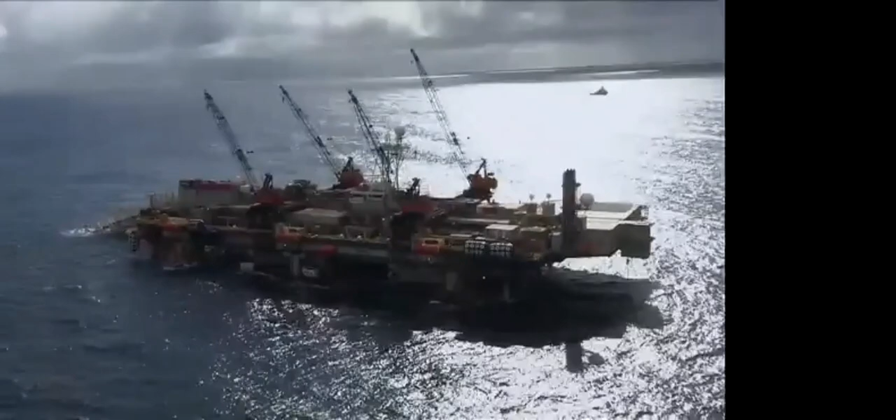It drops onto the seabed over the 1-meter diameter pipe, where its strong clamps pick it up. Then, as the surface ship pulls it forward, the plow cuts a trench 5 meters wide and 2 meters deep.

To fill the trench, the BPL-2 follows behind with backfill to cover the pipe with a protective coating of sand.

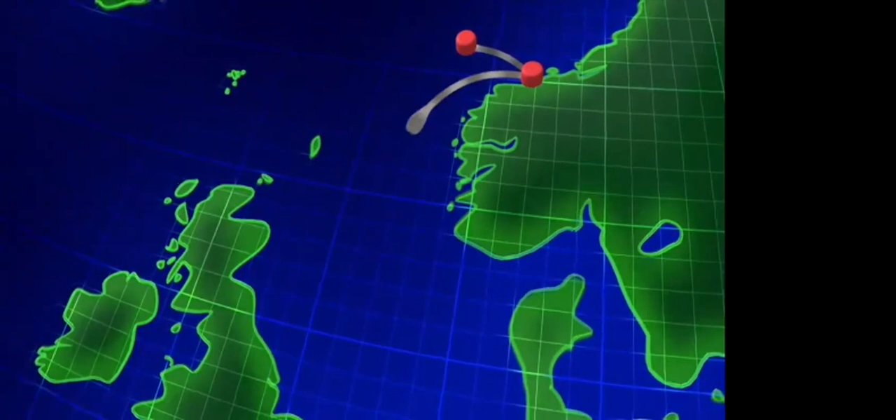Early in the design phase, it was decided that they would bring the gas from the Ormen Lange field to the processing plant at Nyhamna, and then build another 1,200-kilometer pipeline to Britain. At the 600-kilometer mark, the line is broken and connected to the Sleipner riser platform. The Sleipner platform works as a hub, monitoring the 70 million cubic meters of gas flowing into the UK every day.

But tying the pipeline into the platform creates a whole new set of engineering headaches. The underwater robots can line up the pipeline and the connecting pipes coming from the platform. A massive underwater crane moves them into position. But when they're matched up, there is no technology for replacing human beings in making the final connection. So the welders have to also become divers.

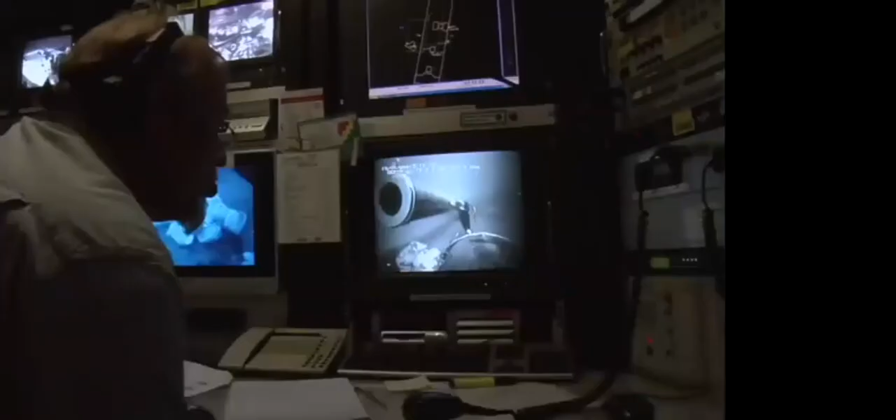You ready to come down? Your hose good? Okay, he's ready to come down. Thank you.

It's just that these welders are working on the sea floor. Like working on the moon, the divers move around in pressurized modules to the work site.

Do one lift on it and see if we can rotate it into its proper orientation with you guys. Hey, you're clear of that, Dearman?

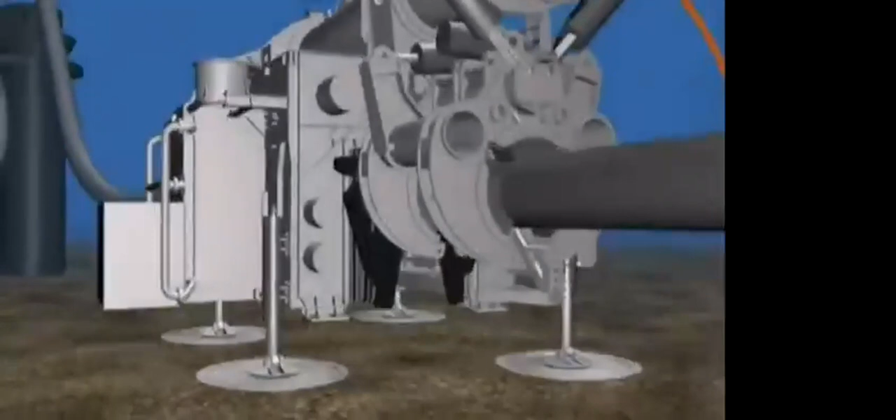Here, new edges have to be cut and beveled at each pipe end before the welding habitat is lowered onto the joint to connect the two sections. The welding habitat is dropped to the ocean floor. It has to be maneuvered in place perfectly over the 1-meter diameter pipe. It clamps the pipe and then closes itself off. The habitat is pumped full of air, forcing the water out.

Topside, the dive supervisor uses cameras to keep a close eye on them and watch for any danger. Once it's safe, the divers move from the module to the welding habitat. Within this habitat, the diver welders make the final, permanent connection. It's a tricky and dangerous procedure.

This is the first of many underwater welds that they'll need to make all the pipe connections to get the gas flowing. 600 kilometers of pipe still have to be completed. But a major goal has been achieved with this connection.

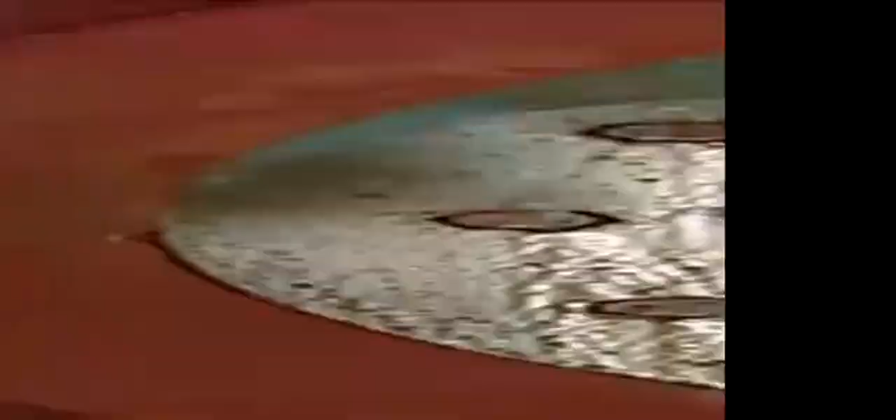Now that the pipe has been sealed and connected, it has to pass inspection before they commit it to the next 40 years of service. This is done with the pipeline inspection gauges, also known as the pig. It makes the epic journey through the entire pipeline, looking for weak spots and breaks. It also scrubs out the crud and salt water. Once in Easington, it emerges and the data is analyzed.

The pipe passes inspection, and the team moves on to the next phase, which is getting the pipe onto land and into the gas plant at Nyhamna. But landfall is blocked by a surprise discovery. A mysterious shipwreck has been found 500 meters off the coast, lying in their path, and there is no way around.

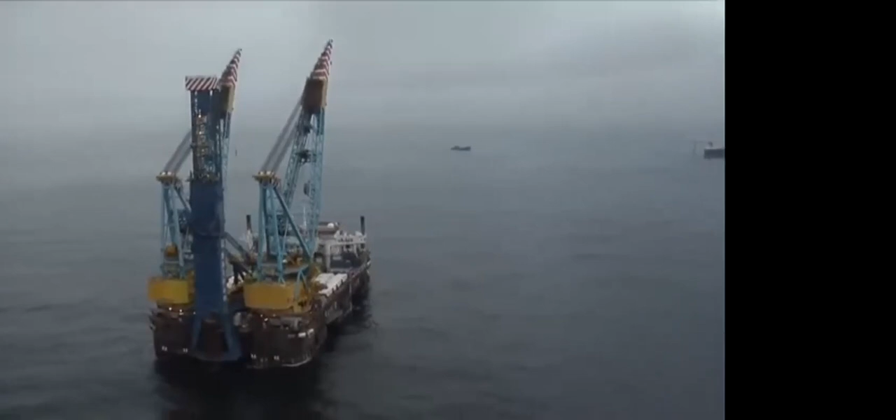This is the most demanding part of the entire Ormen Lange project. The steep terrain left in the wake of the Storegga landslide requires a special pipe-laying ship. This is the S7000. It's a former crane ship. It's been modified with a 130-meter tower on its stern deck. It's taller than a 33-story building.

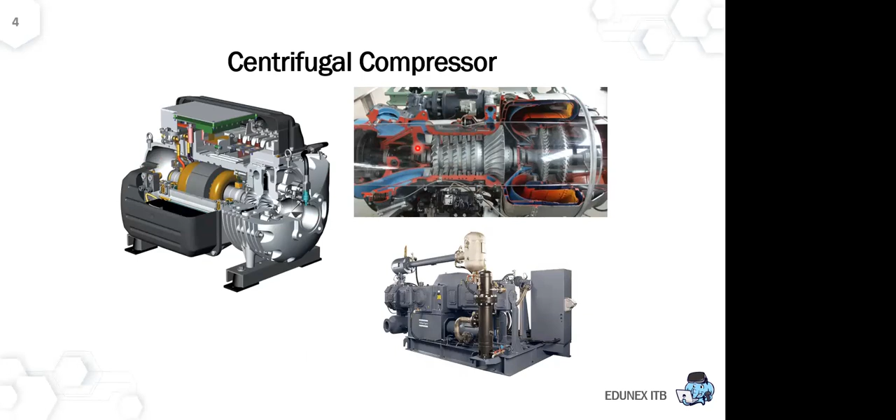Turbo centrifugal compressors are used to elevate gas pressure for several reasons, including the transmission of gas in a pipeline.